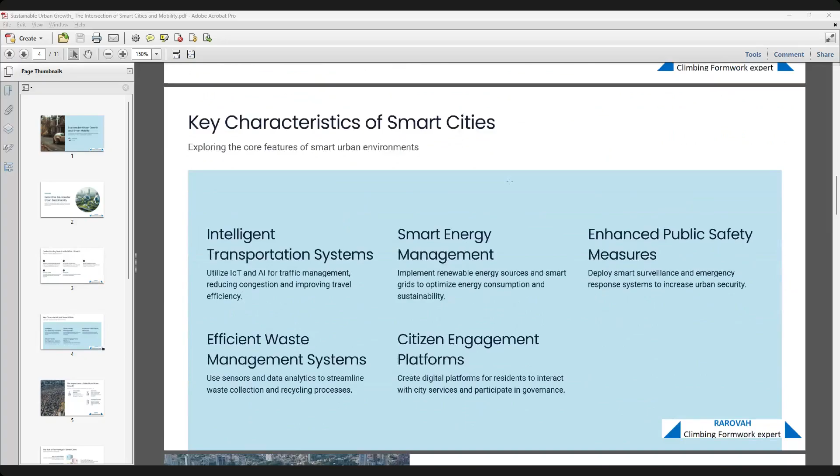So, key characteristics of a smart city. When we are speaking about sustainability, the greater advantage and also the limitation is that when you come up with a new development for a city, it has to be in a holistic approach. Currently, many of you would have seen your hometowns or native places coming under smart city development. Even small towns are in there.

So what kind of improvements is currently being done: sewerage systems are being converted into underground passages, the earlier halogen bulbs are being converted into LEDs, road widening is being done, and water meters are being changed into metered ones. Such things are started at a small level to improve the current living style.

But what we are envisaging at present in major cities is intelligent transportation systems, which means utilizing Internet of Things and AI for traffic management. The current example is traffic signals which have timers running between each side. A study has been done showing the traffic congestion at peak hours, and based on that the timers are set.

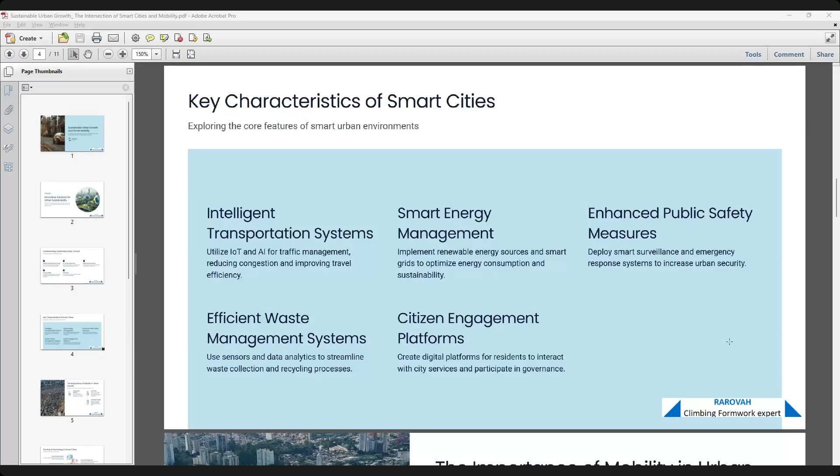Plus, the government has decided that there will be a focused government mechanism, guided under the collector, where eligible factories are subsidized heavily. The current norms are close to 40 to 60% subsidy, but for industries falling in these carbon neutral towns, they are ready to do more than 80%. So there is active talk going on, and there is huge progress in such, even in India.

Going ahead, the importance of mobility in urban growth. So we have seen what kind of advantages mobility can create in urban growth. One, as I said in the introduction, that transportation time, everything depends upon time.

It doesn't mean there is no link, if you delink the distance and replace it with time, the equation changes. For example, this Bangalore city currently is fully congested, and Hosur is also now fully congested, and there is a plan to build metros in Hosur also, and a new airport is coming in Hosur.

Now, how these transportation systems are going to become affordable, and how they are going to play a major role in decongesting the cities. So one is transportation networks. Efficient transportation systems can cut down congestion and pollution in urban areas. So what does an efficient transportation system mean?

For example, someone living in, I'll go ahead with the same example of Bangalore city, which is a very good current example. Someone staying in Hebbal wants to go towards Mysore Road or Outer Ring Road. They will definitely take a minimum of 2 hours.

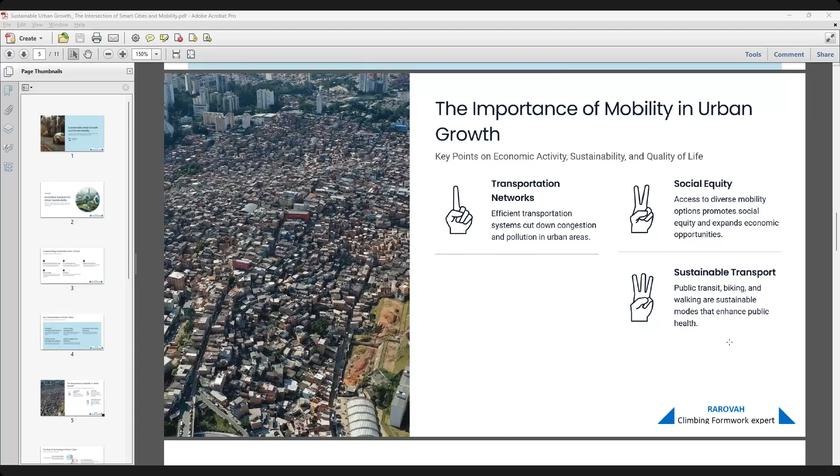So what role can technology play in smart cities? One is real-time data collection, which is about artificial intelligence, where every single movement is converted into data in terms of numbers. You count everything and link it to many attributes like time - for example, peak hour traffic, how many vehicles are coming, how many are using two-wheelers, how many are taking shared vehicles, how many are going with public transport.

All real-time data collection is very important at this juncture, so that future predictions can be done based on realistic data, and the solutions that develop or evolve after that will be close to reality.

So the second one is smart traffic management, which is different from what is currently being spoken about in India, which is traffic control, not traffic management. Traffic management is a vast network of traffic data being controlled centrally, and information is shared actively, and it is controlled.

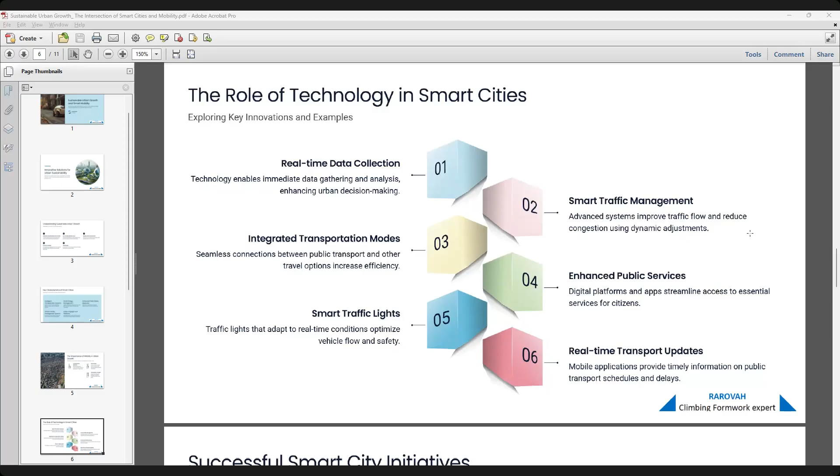So smart traffic lights, as we discussed, we will have to evolve to a point where traffic systems speak to each other, and there has to be real-time transport updates between them. There is a system already in major cities, and it has to evolve and move to smaller cities as well, in a sustainable and cost-viable manner.

And there are a few case studies—if you see, there are plenty, not just three. One such example is Shanghai, which was called an industrial city and was the highest polluted city six years ago. But now, if you see, it is nowhere on that list.

And Singapore's traffic management is one such beautiful example, where the city's greenery coverage is close to 30%, and they have made a command control center to control traffic, achieving 15% efficiency in their system. The same goes for Barcelona's smart lighting and Amsterdam's bike sharing programs.

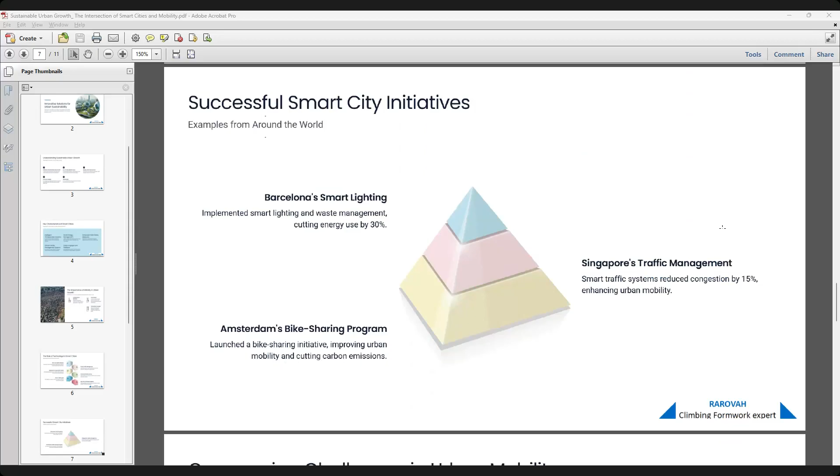So how do we overcome the challenges presently? There are plenty. One is limited funding and investment. A beautiful example right now in India is the development of roads through the PPP model.

Earlier, when I said that present road construction or road laying is hitting 15 kilometers per day, it is not just something we can post about—there are many efforts that have gone behind that.

One is project viability and funding mechanism. There is a new mechanism created for NHAI, where the government funds the initial phase, and the company that will do the toll maintenance and operate the toll has to bring in funding also, which is backed and guaranteed by the government.

So such innovative solutions are coming in. And the bullet train project—the massiveness of the investment is close to 60,000 crore, not one or two, it's 60,000 crore. India has achieved financial closure for that through loans from Japan.

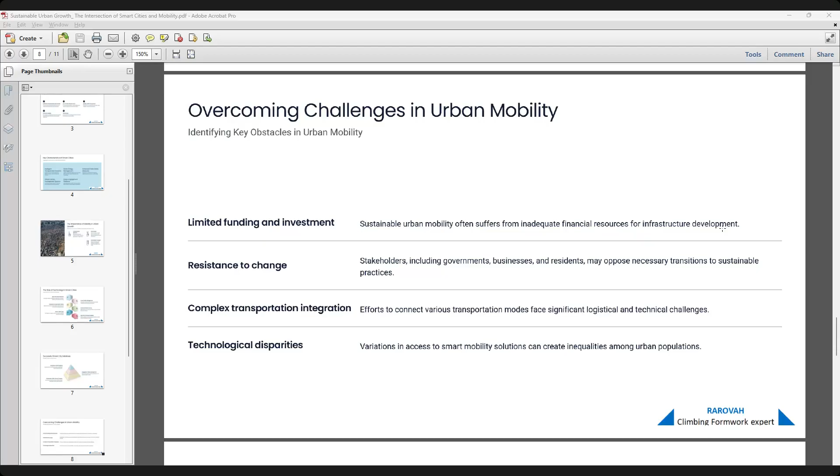Strategies for integrated urban mobility: one is comprehensive transportation planning, which we've discussed extensively, and investment in public transport. Yes, in India we are doing it.

Promotion of mixed use developments is one area major cities are pursuing, with commercial complexes. Take Hyderabad, for example—one beautiful thing about that city is that the metro rail was developed by a private party, and lands were leased to that company. Those lands were used to build commercial complexes, shopping malls, and other things, and they've built enormous parking facilities for the metro. People using the metro can park their vehicles free of cost at that mall just by showing their tickets.

Mixed use shouldn't only be pure commercial space—it has to be developed with residential as well, with high-rise construction of shops. The present lacuna in land usage is that land was given on a 99-year lease. When we speak about mixed use, people will never invest on leased land—the land has to be owned. So there has to be policy improvements there.

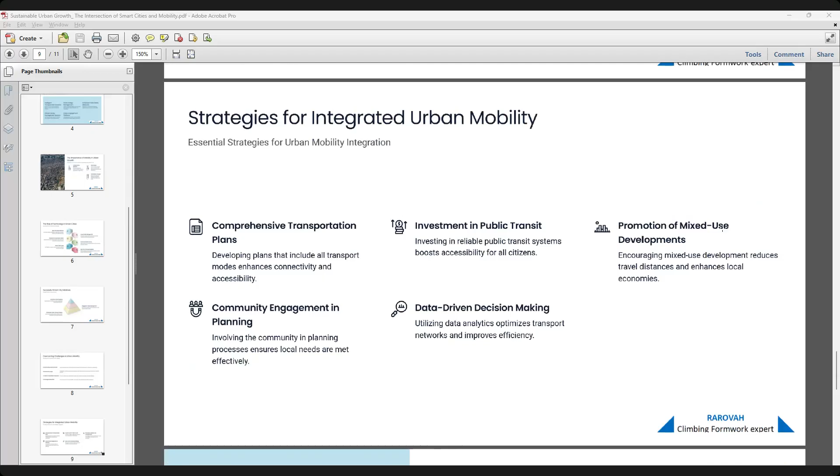So, future trends in smart cities and mobility—many developments are taking place as we speak. One such thing is autonomous vehicles, where vehicles can operate on their own. Many vehicles today are attached to facilities that help maintain lanes, actively monitor the drivers, and auto-park themselves. Going forward, many companies are coming out with driverless, steeringless vehicles.

And electric vehicle infrastructure—it's not only about adopting EVs but also the infrastructure to charge those vehicles. The platform has to be ready and available on tap. And mobility as a service—recently MG has launched this as their solution, where people own a vehicle at a considerable cost but pay only for the distance they travel. It's a very good option, and surprisingly it's being a huge hit for their electric vehicle.

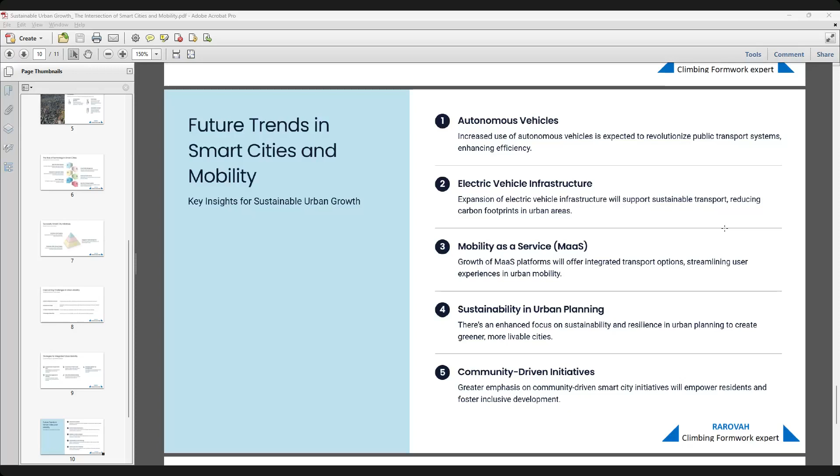With this slide, I'll conclude my presentation. The key takeaway is that in smart cities and mobility, integrated technology for transportation should be helpful across various other safety parameters, waste management systems, and such.

There has to be active participation from many stakeholders, right from the education system, private party players, and pure-play experts from overseas. Many examples are available right now, and we should take such case studies and localize these innovative ideas for better implementation.

So, innovative strategies for urban living—new ideas. We are good at implementing new ideas, and there is no dearth in that.

Future trends shaping cities—anticipating future trends. As we said, an integrated solution means a data-driven approach at this junction, so we can predict future requirements and goals. And for sustainable practices, we should take active lessons from across the globe and implement them here. I'll be open to questions now, if you can ask.

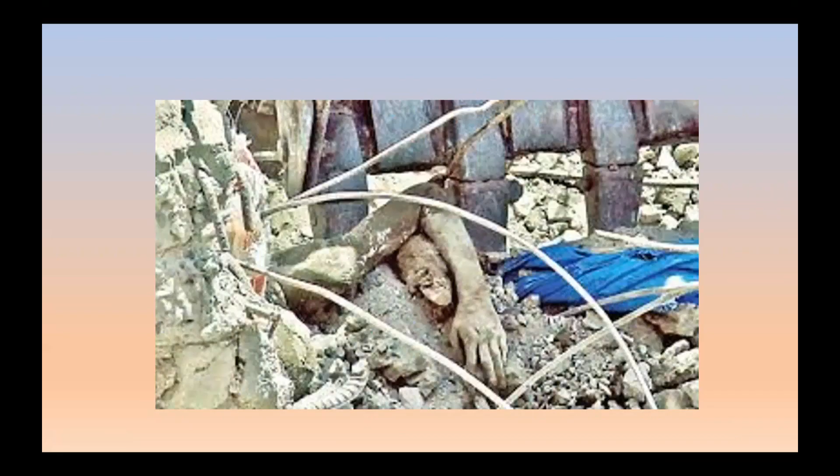These are various images. Since all the participants are civil engineers, I want to show some slides related to the civil engineering field. This is the scenery in October, November, December, and even January this year. Everybody, we are suffering due to a lot of water, particularly in Chennai, Tirunelveli, Coimbatore, Bombay, Uttarakhand. Every year they suffer due to excess rain pouring in the form of cloudbursts and other events.

But this is the scenario after February. Everywhere, all over the world, all over India, even in Tamil Nadu, we can see this condition in the months of April, May, June. Every year we receive a cyclone in some form, naming each cyclone differently. But what is our responsibility to safeguard against this, to at least prevent failure of structures, damages, monetary loss, and casualties? What is our responsibility? These images are almost 100 years old.

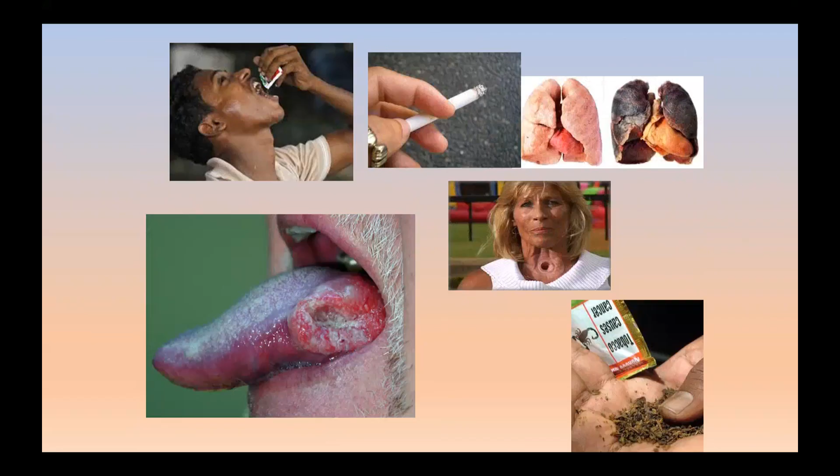Everywhere, everybody thinks that if you throw out garbage or any unwanted things, degradable or non-degradable, from your house to the street or nearby empty vacant land or plot, our problems are solved.

But the world is round. If you throw dust or any waste outside, definitely it will return to your home in the form of water, milk, food, or even air.

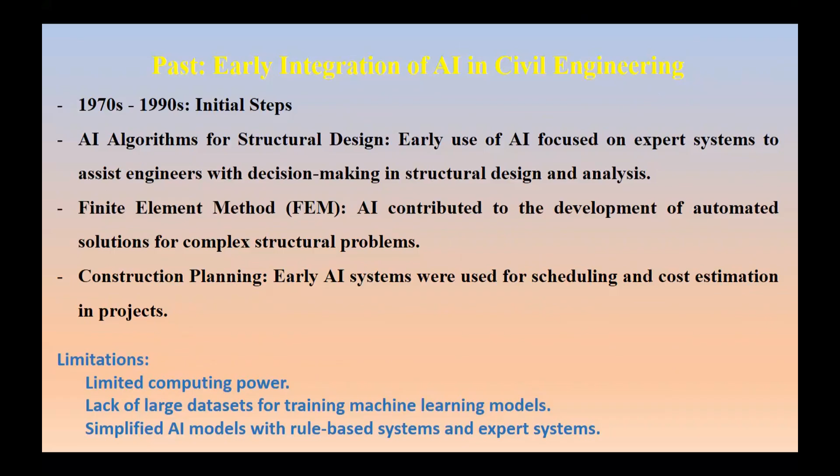Expert systems, particularly in the field of artificial intelligence applied to civil engineering, are still very minimal at present. However, we have a lot of various tools now - very scientific and technologically advanced tools.

The very well known AI tool for civil engineering is BIM, Building Information Model. For almost the past 30 years we have been using BIM. Now we are enhancing BIM with artificial intelligence, machine learning, and various ICT tools, so we can easily optimize or visualize the expected size of the structure, any provision, coloring, facilities and services - everything can be modeled using BIM and AI-enhanced ICT tools.

AI is used to predict structural failure, as mentioned with our 35-year-old compound bridge. Most buildings are now monitored using AI tools to detect when stress changes.

Even electrical gadgets in buildings are continuously monitored using AI, particularly the MEP - mechanical, electrical, and plumbing system. All MEP gadgets are easily monitored using AI in multi-story buildings or any type of building, even small houses, to monitor structural services and structural elements.

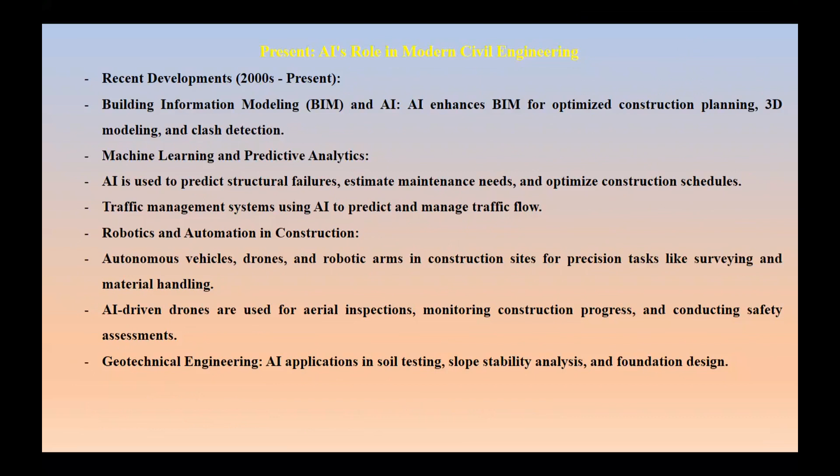Then see the application in geotechnical engineering, from soil testing, mapping, slope stability analysis, and design of foundation using AI, very effectively we can apply in geotechnical engineering.

Now, what are the well-known AI-driven software available? Almost all civil engineering software is now embedded with AI. But mostly if you are familiar with this type of AI-enabled software, it is a boon for improving students and increasing their employability potential. If you teach them, they will definitely become an asset for our nation.

Now for AI in smart city, in our Thanjavur, I am the independent director, and in various parts and places we have effectively used AI. But the problem is sometimes cooperation from the public is an issue. In future, our people will definitely realize the application of AI in various areas.

The application of AI in smart city planning spans from planning to execution, and after completion of the smart city concept, maintenance and monitoring everywhere. For example, in Singapore, there is a proper application of AI for monitoring all activities—transportation, and even the supply of water and gas—everywhere they are effectively using AI.

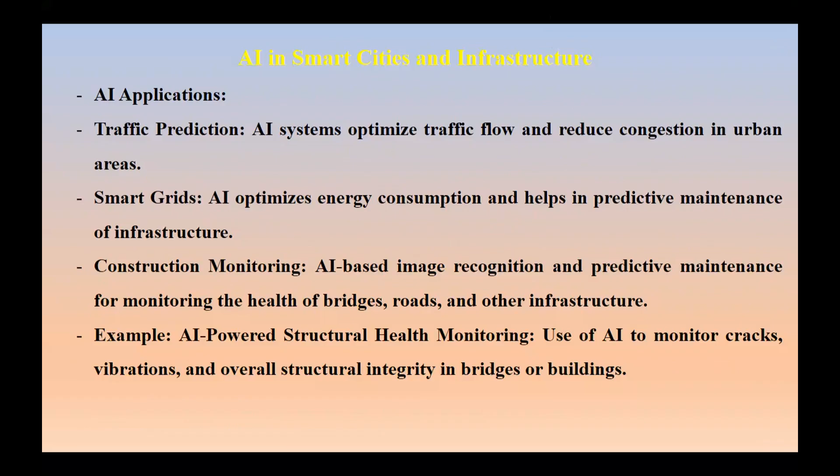So we can easily monitor the structures, the integrity of buildings and bridges or any structures. It is easily possible only by using AI.

Then what are the challenges in the present AI adoption in civil engineering? As we have mentioned, the data quality. Nowadays the available data is more, but the quality of the data, or the applicability of the data, is very questionable.

The data quality and availability is very questionable, because most of the quality testing, even for academicians we know well, is done for namesake. People are testing the materials, just casting the cube, but one day they bring some false data for the testing. Simply they get one signed certificate to claim for the bill, not for quality maintenance or quality management. Just to claim the bill, they test the material. Similarly, even soil testing now is only conducted for namesake to get the bill, not for structural design or foundation design.

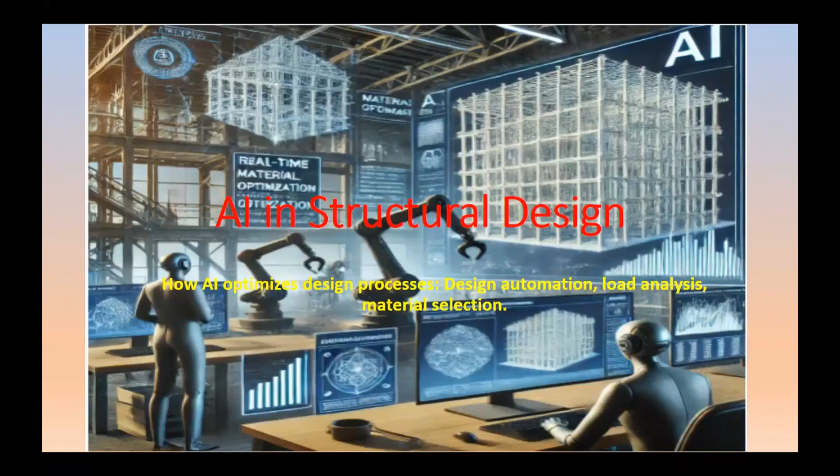So how is AI used in structural design? In structural design, we are using AI in analysis, planning, and other things, during the process of designing, at all levels, to solve very complicated problems, particularly in decision making. We are using AI tools so we can enhance the application of AI in decision making.

Then design automation: nowadays we can get various iteration processes. Even if the size of the matrix in the finite element method is very large, we can easily, within no time, get the output of design, analysis, and other things with various iteration processes. We can easily modify the data, modify the size of the elements, and optimize the size of the element or anything using various trial and error processes with AI tools.

This extends to drafting, even layout preparation, for effective usage of the entire area, using trial and error processes for drafting the layout. We can use the AI system for this.

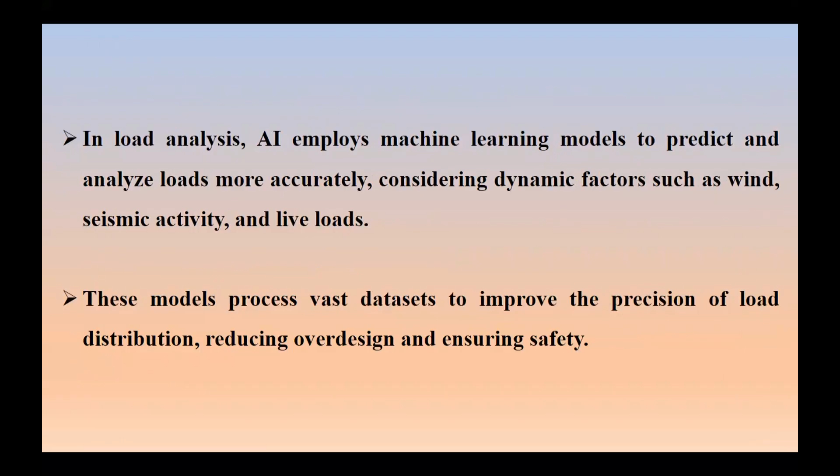So even in the coastal area, tsunami and cyclone. Easily we can analyze any structure, then for proper design analysis and distribution of the load with the actual expectation, we can easily model the process of building using AI to further optimize the design.

Then neural networks are used in the design, but in the neural network another problem is the training of the data. So various available data can be used for the neural network analysis. Using the previous data, we can design a new building without failure, without cracks, or even with minimum repairable condition, even during an earthquake.

Then using AI, the material selection is another important factor. The compatibility between various materials is another major factor in stability or minimum maintenance cost for the building. That is another major problem.

Now we are slowly eliminating the usage of wood in the building. We are using galvanized sheet, aluminum, and even fiber reinforced doors are available now. We are using various materials, but compatibility between the materials is another issue.

For example, our fly ash bricks, everywhere we have complaints against the fly ash brick, because it is not compatible with the existing reinforcement. They are complaining at the site that a lot of cracks are available, particularly temperature cracks or shrinkage cracks in the fly ash brick masonry.

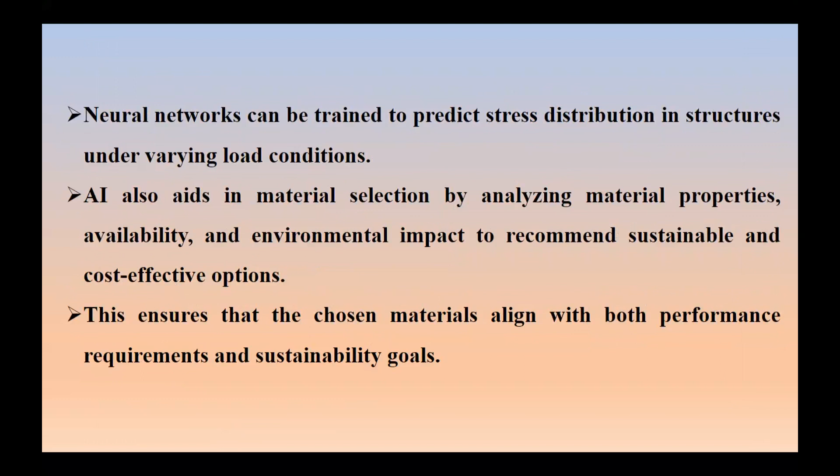So the green building rating is now becoming famous in our construction industry, particularly in the real estate business. It is a very catching phrase - sustainable construction as well as green building rating, everything. So we can use the AI part.

Then using various recycled material or lightweight material or any other low cost, cost effective material without compromising the strength - this is another problem in the construction industry, to minimize the cost as well as increase the lifespan of the structure.

So for that, AI driven tools are very essential, and it is a very good advantage for selection of proper compatibility material for lightweight concrete or lightweight blocks or any material without compromising the strength of the material or concrete.

Then another benefit is reducing our manual labor by increasing accuracy and innovative solutions for the construction process or the design. So that is another advantage of AI.

Then for various modern construction tools, nowadays we have a lot of equipment, a lot of technology for construction, but all the construction technology as well as tools are enabled with AI. So if you are familiar with all the AI tools related to civil engineering, machinery, and technology, then only we can optimize all the process.

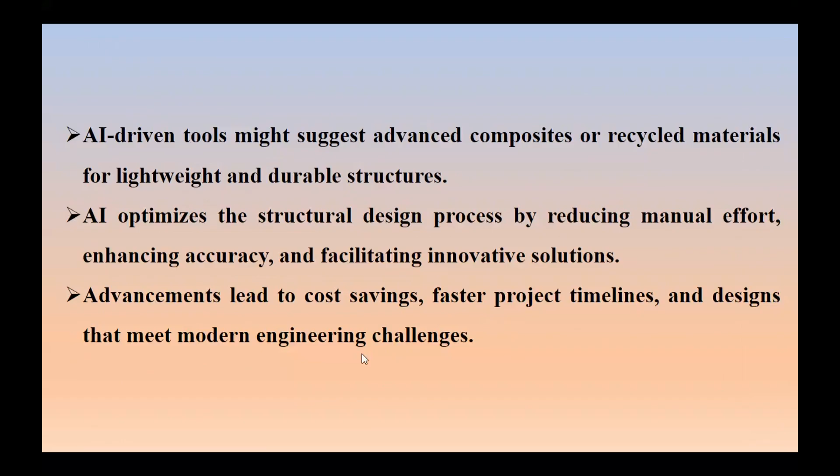Then in the geotechnical engineering field, from starting with the analysis or soil classification process, particularly the identification - soil is a very, very complicated process or complicated material in construction, because soil does not have any unique property, it is not uniform from place to place. Even within a 1 meter interval, there is a lot of change in the soil, in the vertical direction as well as horizontal direction.

We are saying that soil is a homogeneous and isotropic medium, but soil is not like that in the natural deposit.

So due to the decision making for particular soil variation in the horizontal direction as well as vertical direction, the application of machine learning is very much essential for proper design of foundation, particularly identification of the type of soil.

Now a lot of possibilities are available. If you conduct the soil test in the laboratory as well as in the field, if you get the proper data, you can get the proper soil classification, soil type, and various things, particularly the plasticity index.

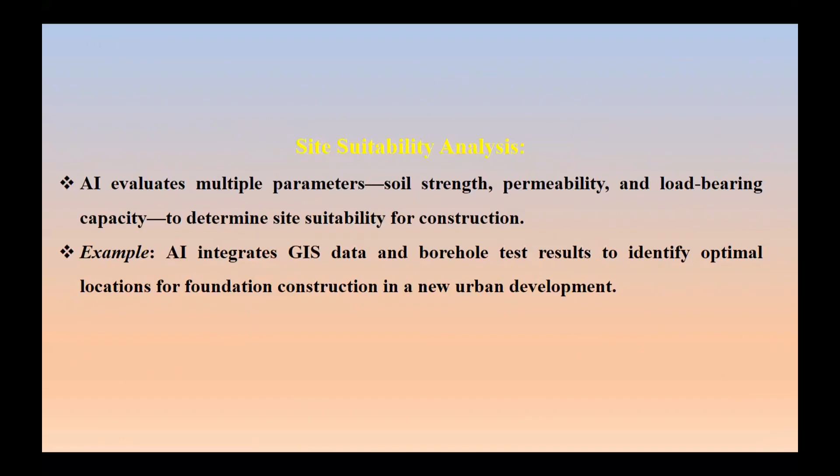There is another opportunity - using GIS data and borehole data, we can easily map the soil profile at various locations without any further soil test.

We can easily apply various tools for landslide and land hazard analysis. Now everywhere we can do this - if you go to our Himalayan ranges, there are a lot of avalanches and landslides. If you can monitor the slopes, only because of AI tools can we now easily predict these.

Like this, we can easily apply AI tools for landslide analysis in hilly areas, river banks, or any important structures, particularly even in highways. For that, we also need historical data and environmental data.

So the data set is once again another problem for proper analysis. Then there's liquefaction analysis - most people don't know what liquefaction is and its effects. In our area, so far we are not facing any earthquake.

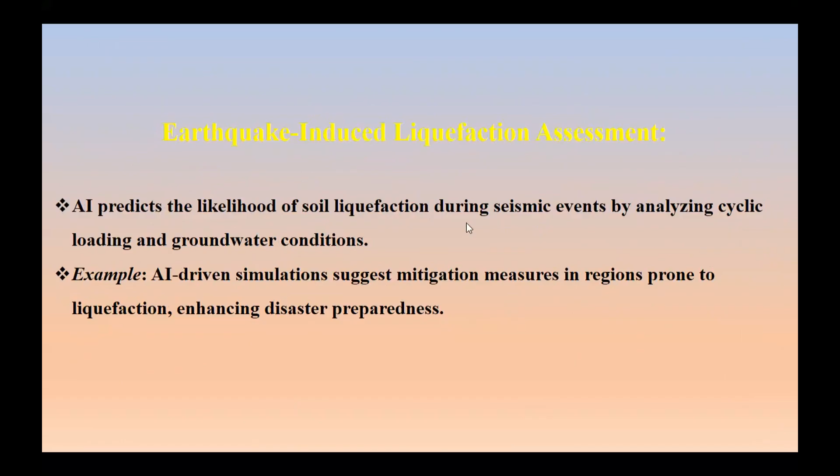Then similarly, for the analysis of deep foundations - another major problem is that at shallow depth, when we excavate the soil we can find out the proper properties, but even at shallow depth we are not properly conducting the test. At 5 meter, 10 meter, or 15 meter depth, we simply get disturbed soil only.

From the disturbed soil we are getting the data, and using the disturbed soil data we are designing the foundation. But if you use AI tools for proper interpolation or validation of the soil data, you definitely get proper data for the soil, for the SPT as well as CPT. So cone penetration test and standard penetration test results - we can easily predict the false data using AI.

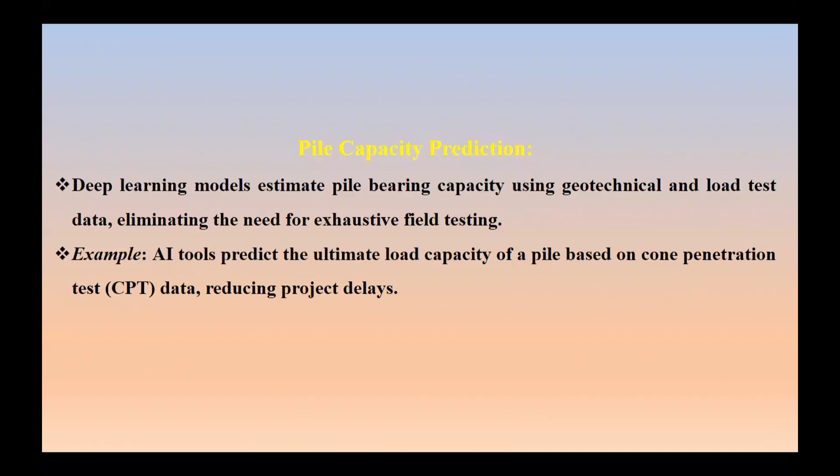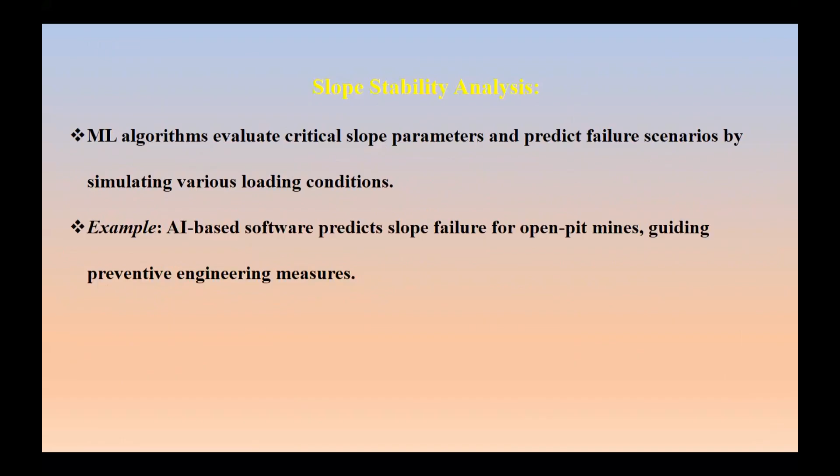It is available now. So as we have discussed, various applications of AI tools in the open pit, not only in open pit but various slopes, even river embankments, road embankments, highways - everywhere we can analyze and integrate geotechnical data. It is another major area we can easily apply for prediction of failure of the soil, then design of foundation.

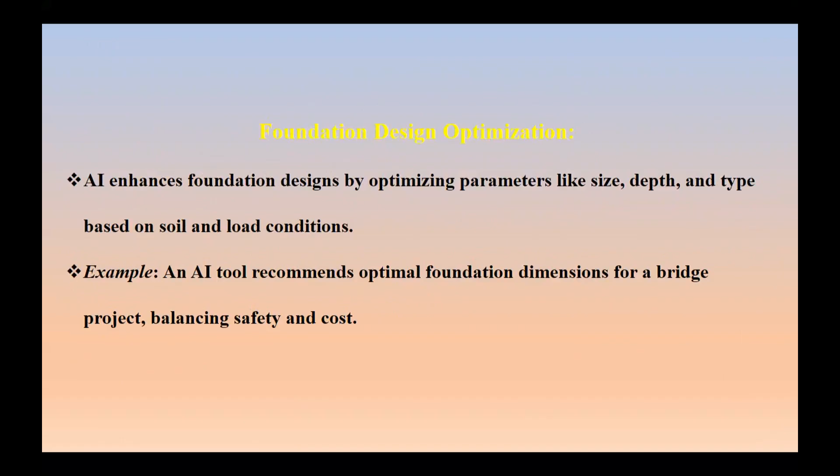So for the design of foundation also, we apply a lot of AI tools for permutation combination of various designs - buildings as well as bridges or any type of structures. Even for the runway we are now using AI for the design of runway and taxiway, everything we are using.

Then groundwater analysis, finding out the groundwater potential, particularly contamination of the soil due to dumping of waste in various cities - starting from village to town, panchayat, municipality, corporation, everywhere the dumping of waste, particularly mixing up degradable and non-degradable waste, is creating a lot of problems. It is contaminating the water. Now every city is getting not suitable to drink the water. So that is the major problem.

So we can easily predict the model if you know the permeability of the soil, if you know the proper parameters of the soil, other parameters, then the hydrological data at the particular area - we can easily model the groundwater flow, and we can eliminate contamination of the soil and groundwater. We can safeguard the hydrological data, even recharge our aquifer. Recharging the aquifer is another major problem, so for solving aquifer recharging using available rainwater or any water, modeling is now available using AI.

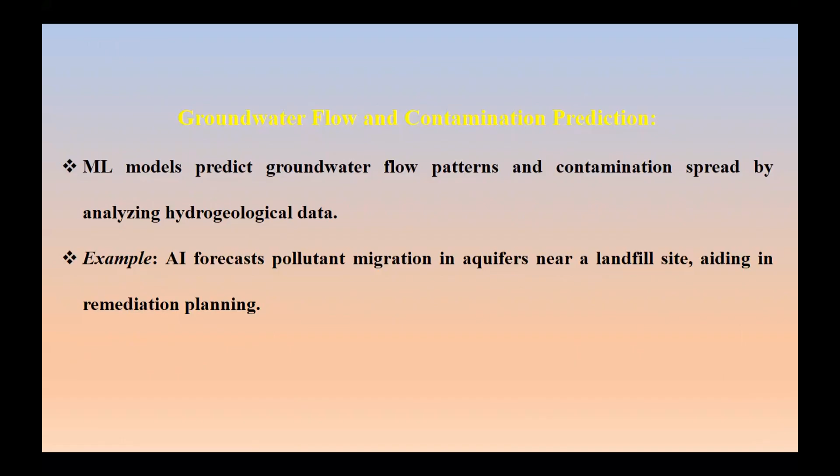So seismic hazard analysis we have already discussed, but during analysis, design or construction, everywhere we have to incorporate various seismic forces - not only earthquake, but even bomb blasting, and resisting bomb blasting damage to structures is now easily possible using AI tools. That is another advantage of using AI.

Then construction management - optimizing the various schedule, optimizing usage of labor, optimizing usage of money, everything is easily possible using Primavera. In Primavera they have integrated the AI tool, so within minimum time we can easily optimize all the schedules. You don't spend your time or disturb your brain to optimize the schedule and minimize the critical path using your own brain - just ask the AI tool and immediately it optimizes everything. You can change and modify everything.

So real-time monitoring with computer vision, automated surveillance is now available everywhere - not only on roads but in-house, in all structures, for safety and health monitoring, and to increase the lifespan of anything.

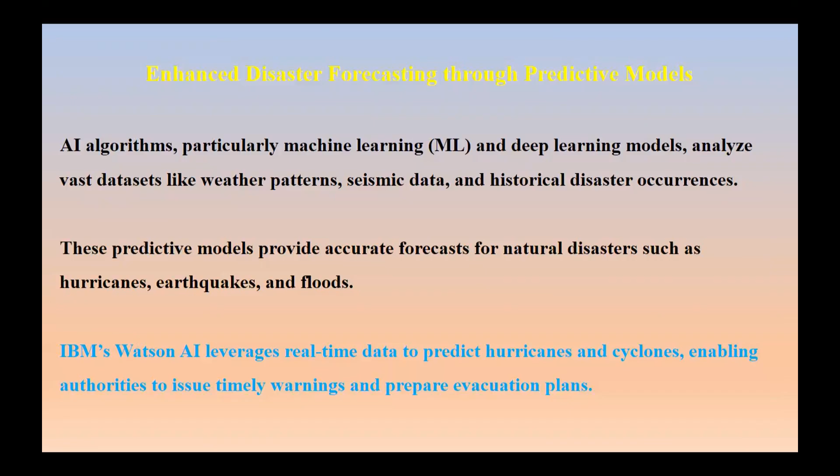Real-time monitoring, early warning systems, starting from building foundation to all these areas. Similarly, tsunami warning systems, earthquake warning systems, even flood warning systems can be applied to every part of our construction.

For example, the Pacific Disaster Center has an AI-based platform for monitoring various disasters for potential usage. They use it to optimize disaster response and resource allocation, so that from the warehouse to the needy people, material should be effectively supplied and distributed. From availability to distribution, we can easily monitor using AI tools nowadays. That is a major area we have.

Then DRR, predictive analysis for disaster risk reduction. Even now, more than safeguarding people after the occurrence of a disaster, safeguarding people from any disaster is the major requirement. So we can easily monitor or predict any unwanted events.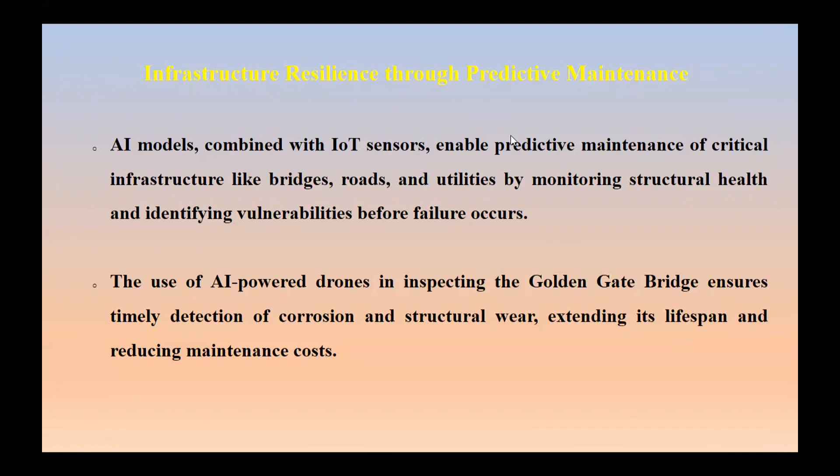Then infrastructure resilience through predictive maintenance, to increase the resilience of any structure. That is the basic requirement for damage-free or maintenance-free structures. During planning, construction, selection of material, and after-construction maintenance of any infrastructure element, we can easily make decisions using AI tools, which leads to effectively reducing maintenance costs and other things.

So IoT integrated smart utilities for sustainable development is another tool. Nowadays IoT devices are everywhere, effectively used to monitor systems—energy supply, water supply, or waste management. In smart cities, you cannot simply throw waste wherever you want; it is properly monitored, and people misusing the area can be caught and made to change.

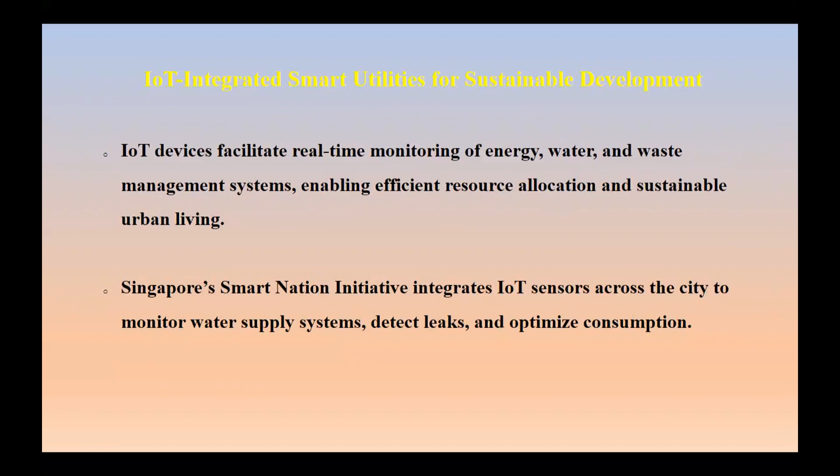Similarly, in Singapore, you cannot see even a small piece of paper in the street or anywhere; the whole city is totally clean and you cannot misuse the road. People don't even want to use the horn during driving, because all of Singapore is monitored using an IoT integrated AI system.

Similarly, AI-driven disaster management systems cover accidents, earthquakes, or any natural or man-made disaster. In transportation, everybody knows driverless cars are ready now, and similarly for metro systems—without metro systems we cannot solve the transportation problem in any city in the near future.

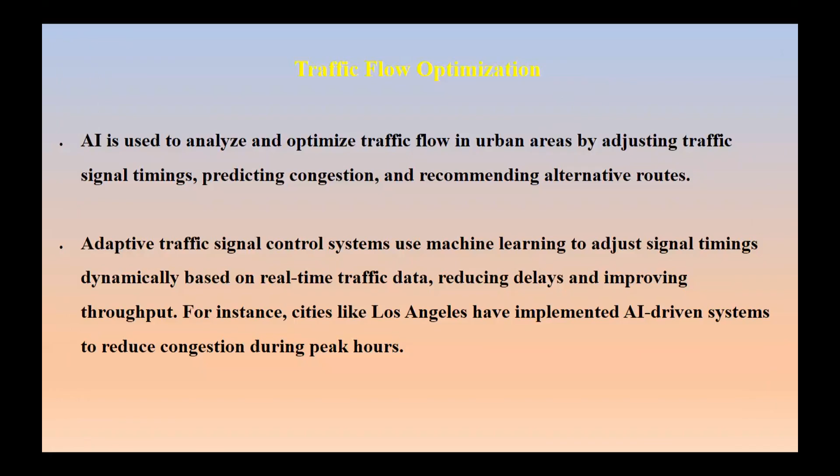With the application of AI in optimizing traffic flow in urban areas, even operating signals based on the available number of cars waiting at the signal, very soon we can monitor and operate without any standardized time interval for signal operation. Real-time operation of signals using real-time data is easily possible using AI.

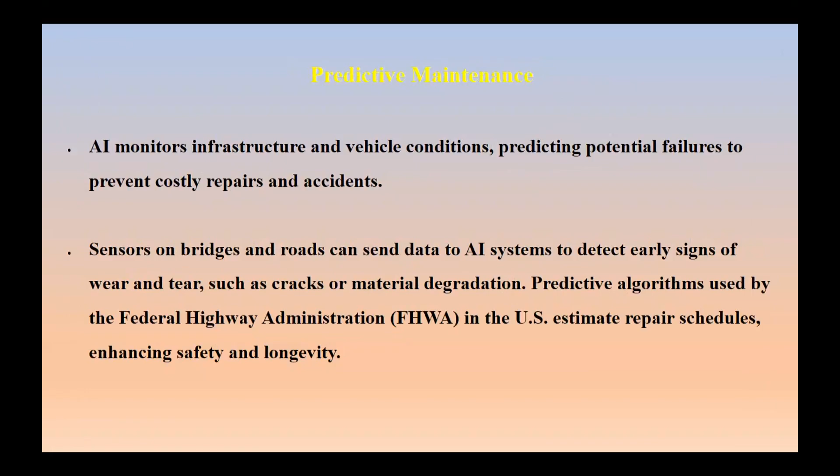So then similarly, maintenance of the highways or bridges or any infrastructure, that is very easily we can do using AI.

Then autonomous vehicles. Now EV, autonomous vehicle, is another boon for our traffic system. Very soon there is no need of drivers. Even without knowing driving you can drive. Tesla has already implemented this. Even during turning, only our wheels make the undulation, but the vehicle travels without any change in horizontal direction.

Then incident detection and management is another one.

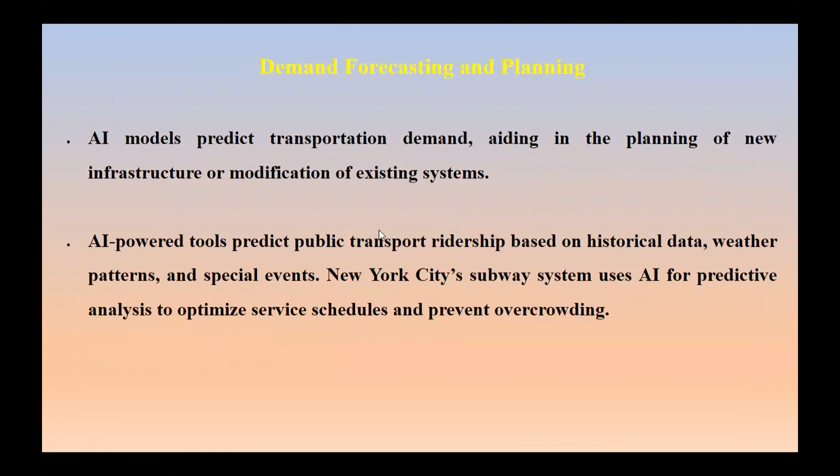Similarly, demand forecasting and planning for the transport system. For example, New York City subways are very effectively used by optimizing the scheduling as well as predicting real-time data and applying that data to solve problems.

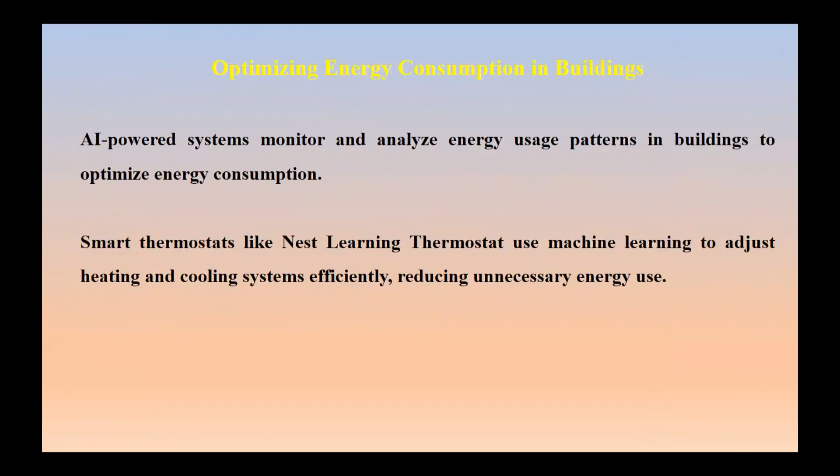Then environmental sustainability: energy consumption, energy monitoring and energy supply. Everywhere we can use AI powered monitoring systems. For example, smart thermostats like the Nest Learning Thermostat use machine learning. Even for heating and cooling systems, that is MEP. In MEP, a lot of AI tools are available to implement or incorporate.

Similarly, for increasing renewable energy, we can use AI tools to predict weather patterns. We can operate solar panels to optimize harvesting of solar light. So it is now possible. Even Adani is using AI tools to optimize solar harvesting by operating solar panels depending on the direction of the sun.

Similarly, reducing waste through proper logistics systems - in logistics or supply chain management, it is another application of AI tools to minimize time and wastage. Not only reduction, but because of smart logistics we can also reduce carbon emissions. From that we can save our climate, reduce climate change, and decrease global warming.

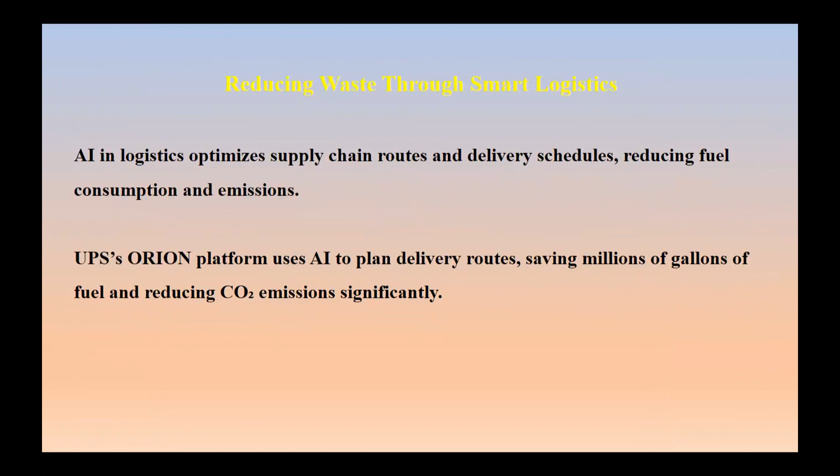Global warming and climate change lead to various new developments of bacteria, virus, fungus, and everything.

For carbon emission, now all district headquarters and district environmental officers have installed environmental parameter detection devices. They measure particulate matter, dust, moisture content, sulfur content, and every carbon emission. They immediately get real-time data and take corrective action to minimize everything. In most of Delhi, detecting various atmospheric data is now going on effectively.

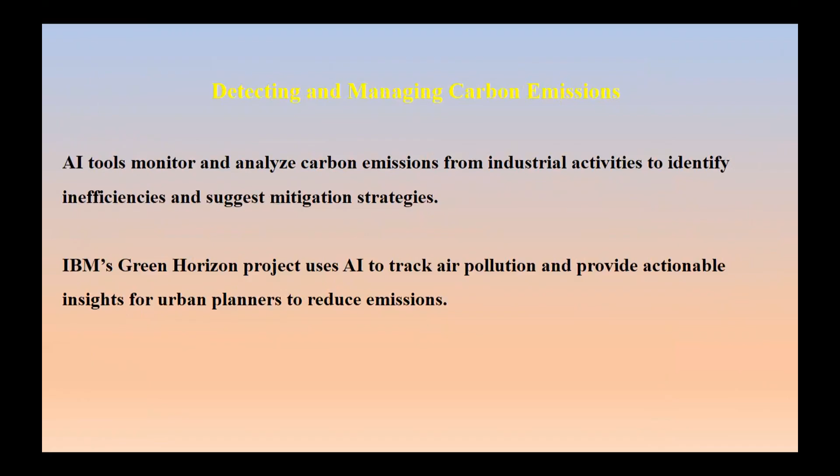This is the final and very important application of AI tools, that is the circular economy. That is another major part where we can use AI.

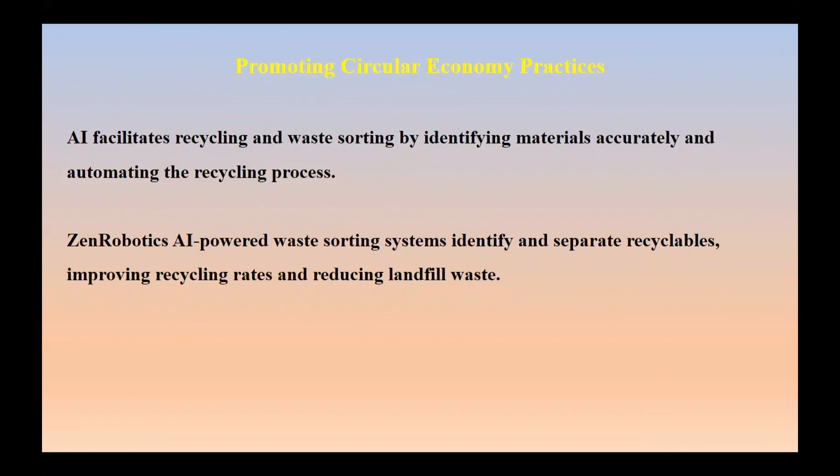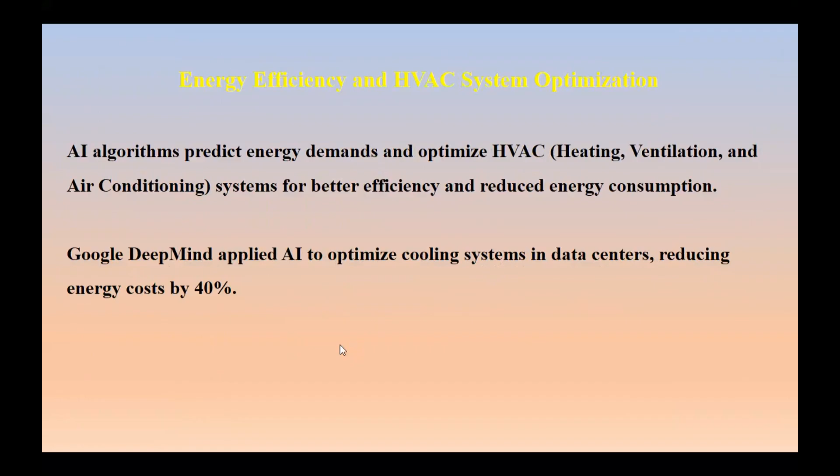Then HVAC - heating, ventilation, air conditioning system. We can increase efficiency and reduce energy consumption only by using AI algorithms and AI tools. Google DeepMind is a well-known tool to optimize the cooling system. Most Gulf countries, Western countries, and developed countries are using very effective AI tools to optimize the HVAC system and increase efficiency of the entire system.

Not only to increase efficiency, but for maintenance - the MEP system maintenance is a major problem, unlike our structural elements, because the MEP system is under 24/7 operation condition.

So that is the lot of wear and tear, lot of failures, or even in the plumbing system, lot of leakages, oil or gas or water, and similarly some sedimentation of even water supply, the sedimentation of minerals inside, similarly the cooling system, the scaling is another major problem in the cooling system. So everything can easily be predicted using AI systems now.

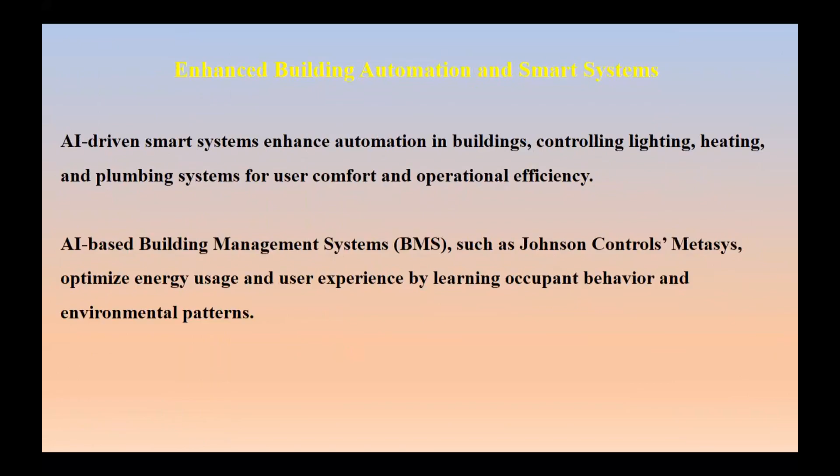Then construction automation, scheduling, enhanced building automation - this we have already discussed, so a few more points only.

AI in sustainability, already discussed something, but there is still a lot of scope to increase the sustainability condition in buildings using various AI optimizing tools like material usage, reducing energy consumption, improving waste management. Waste management still faces a lot of failure because of the behavior and attitude of the user, like us. So in waste management, if you use AI, we can definitely find the solution to segregate waste at the source.

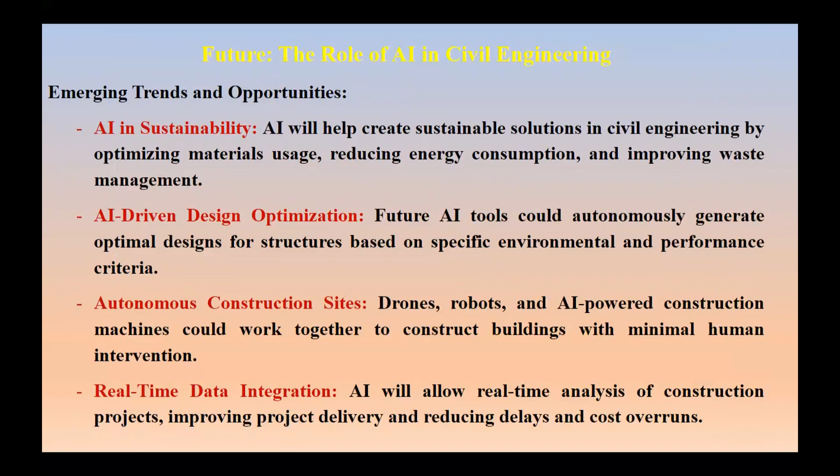Then design optimization, then autonomous construction sites - there is still a lot of scope to automate the construction process using drones or robots or any machines enabled with AI, and then real-time data integration. That's another, including signal processing or material supply or labor supply. Integrating real-time data with AI tools is very essential for effective usage of materials, instead of just predicting or forecasting future usage - real-time data is very important.

Then AI-powered building information modeling, still we can improve. AI-driven design - already we have for 100% efficiency in planning, designing, and other things we can use. Then sensor-enabled embedded infrastructure.

Right now we are using sensors only in very important structures like hospitals or very high-rise buildings, or in bridges or any transport system, or our nuclear systems - but we can make use of sensors even for houses or small buildings. We can apply this.